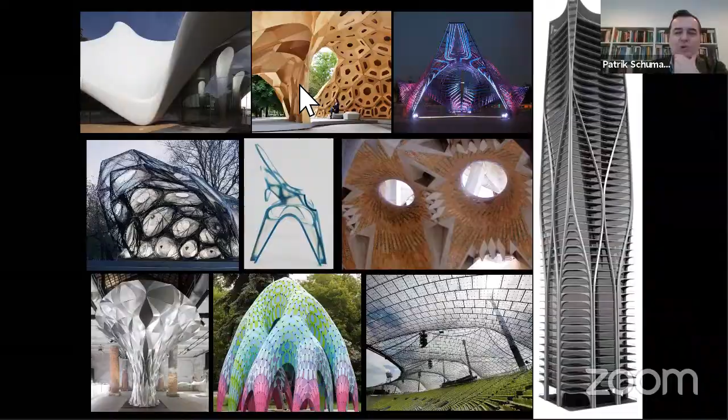We had worked towards this on a number of projects where we try to express the structure, in particular using the differentiation of the structure, which should be, if properly optimized, different at the lower part of the tower, mid tower, and upper part. So these members become more networked, denser and thicker at the bottom, and less networked and more filigree at the top.

We've done that a number of times, sometimes using topology optimization. We did a lot of that with students first - the DRL and also the Vienna studio explored these opportunities. The idea is that the differentiation of the skeleton becomes a guide for programmatic differentiation.

There's been a number of examples - from New York, for Kuala Lumpur. You can see here the very strong differentiation in stages and segments, a kind of gradient. This is the other one, the second skeleton tower we've managed to execute. Sorry, I have more images later.

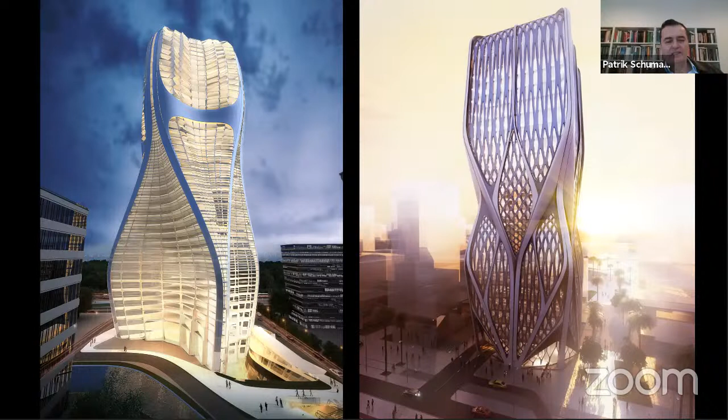This one was a study for Rabat, another study for another Middle Eastern tower, because the depth of the skeleton relief, and then a secondary facade kind of structure, can also do shading work.

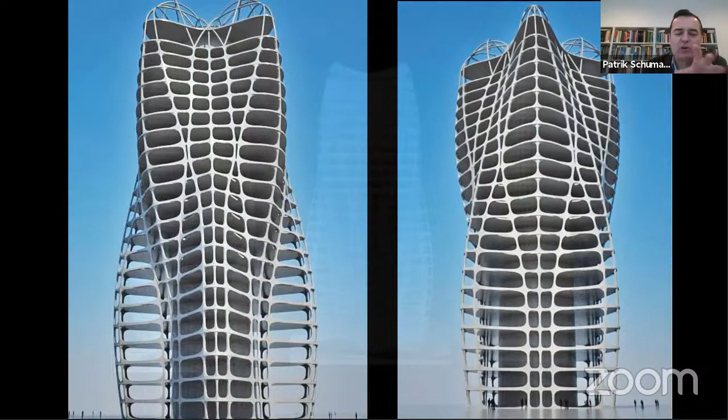This we got relatively far with - this was for Bilbao, but in the end it also didn't work. So you can see the interesting topic of layering facade and structure.

This was more or less simultaneous with the Miami design. Some towers in Brisbane, Australia also didn't come through.

These larger projects have so many factors which can get in the way, whether it's finance, something happening with a client, or neighbors putting injunctions. That happened here, by the way.

This is the tower in Macau, where we also managed to finally get something built.

Now this is the Miami design. I think it's beautiful - the rhythm of differentiation, the way the skeleton moves through different phases as it moves up and becomes quite full and open, with the column splitting up at the corner, quite heavy and encompassing the podium at the lower part.

Initially this was also designed in a way that we were briefed with 3 apartments at the bottom part, 2 apartments in the middle part, and 1 apartment per floor at the top, and this was aligning with the changing structural articulation.

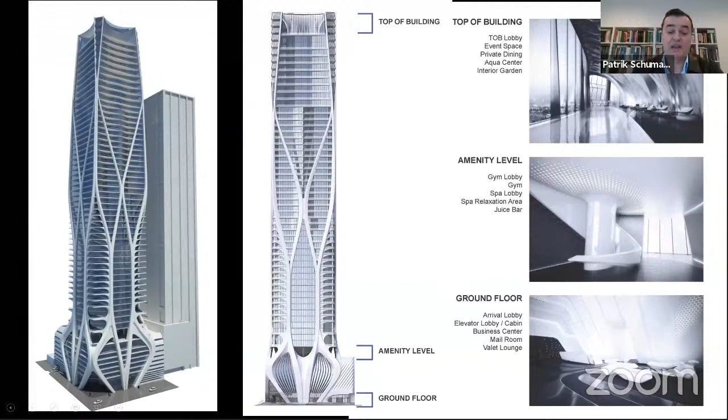You can see here already we had worked on all the interiors as well - fantastic lobby spaces, pool deck and amenity between the podium, which is car park by the way, and then top of tower special amenities for the top two floors up here.

So this is the way it was rendered out. This is a Chad Oppenheim Tower, same clients - it's one of the best towers, I think, in Miami as well. So these clients definitely have taste.

This is the way I used to show the project before we started to build - rendering out the beautiful tower and then showing top of tower, showing these balconies and the vistas you would get.

Later on I have some photos - we actually built, couldn't find a photo now, but we built a mock-up of this whole balcony part, which had to do with a special construction method of having precast elements pulled together around the rebar and then filled with concrete. It's a kind of solid bond of prefab and in situ. Only at the bottom part we had to shift to in situ, then cladding afterwards.

I don't have many floor plans in this, but this is the floor plan of the pool deck, and it's interesting - quite beautiful. You get the pool and a fitness area, and then this fantastic loggia where you also see the structure, between the structure and the facade. I have photos later of that - that's the condition here.

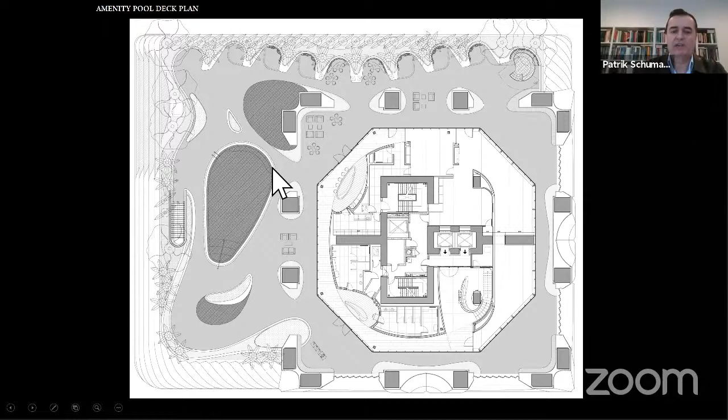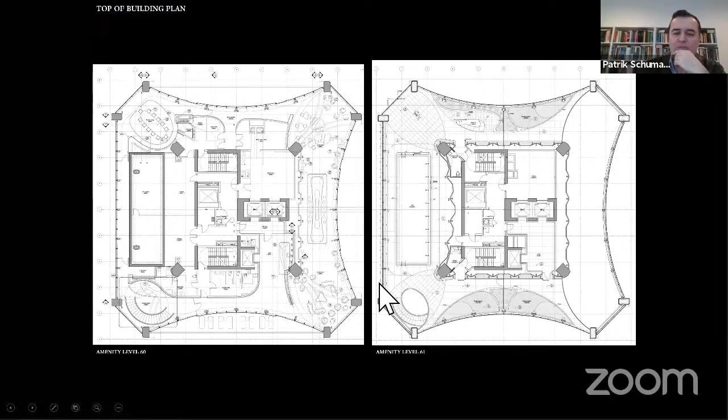So this is the plan for the top of the tower, with the pool areas and the split columns, etc., and very fantastic social spaces. That's where we had the opening party - unfortunately couldn't find images of that yet. Last year we did the opening party in the winter. So this is a design with some double height area, a special big table, massive table, and then pool up here, and a beautiful staircase swinging up across these two levels.

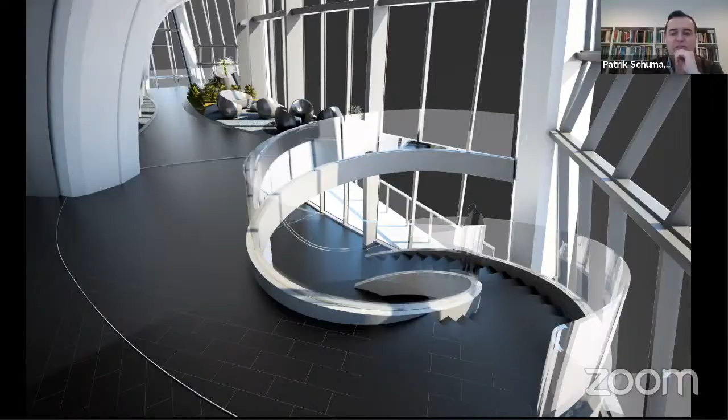This is a rendering, so this is a construction that went rather well. There was certain risk involved to use, for the first time in the world, construction to ship these panels from Sharjah and bring them together around the prepared rebar, lock them together. Initially it was meant to be just tied together. In the end they also had steel kind of braces to pull them together, and then pour the concrete and do that floor by floor. This was only possible because the concrete manufacturer was also connected to one of the investors, actually, so there was a synergy, and the risk was just taken. It went well.

Here you can see that at the bottom this was in situ. Here you can see we started up here - up here we started with this special system, and below it later on the cladding was put up, because these curves were too strong, and also timing meant we just had to get the thing out of the ground and couldn't wait for this kind of special technique to come through. And this just was a thrill to see when we came, before it was finished - seeing these things going up and the beautifully sculpted surfaces.

And this voluptuous sense, and this is around the car park. These are fantastic multi-story boomerangs to screen the car park, and of course let a lot of air and ventilation into the car park. Some of these panels were inhuman to place - we were cursed by our project manager on site. It was fantastic, I mean they're super precise, but Chris Lepine specified one centimeter tolerance, and that was obviously absolutely inhuman.

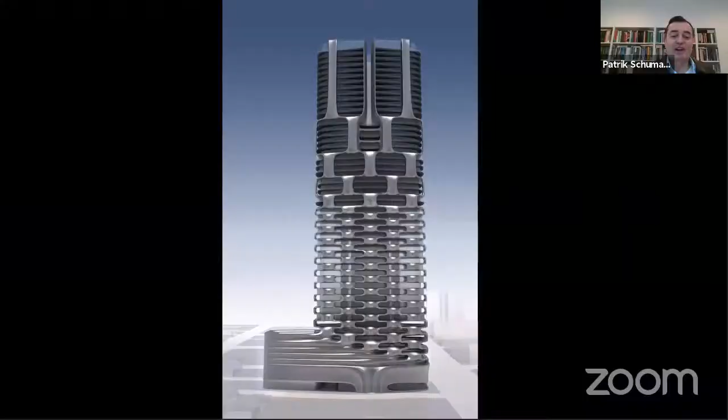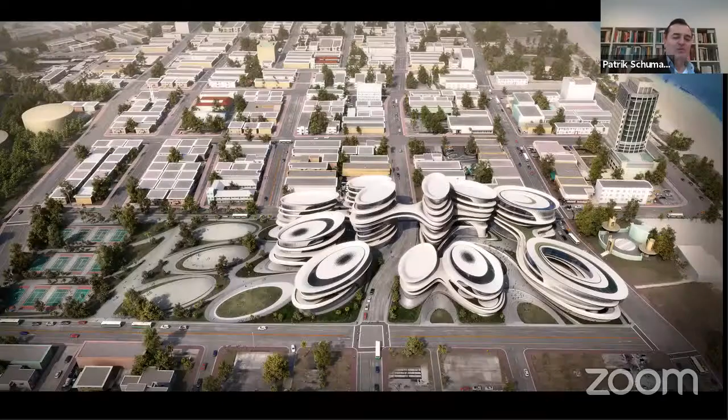We had these kind of Russian origin clients who wanted to do another one close by. So we started to sketch this, but it didn't come to anything. But I wanted to end up with this because this is something which I thought was a very nice idea and a nice design.

This is Miami Beach. There's a kind of large site. And the idea here is this to a private university by a Brazilian university entrepreneur to launch that in Miami. I think it's a great idea with all the Latin Americans converging on Miami anyway, to get a lot of Latin American students maybe come there. So it's quite dense with the gardens and with these kind of shading areas and balconies and bridges.

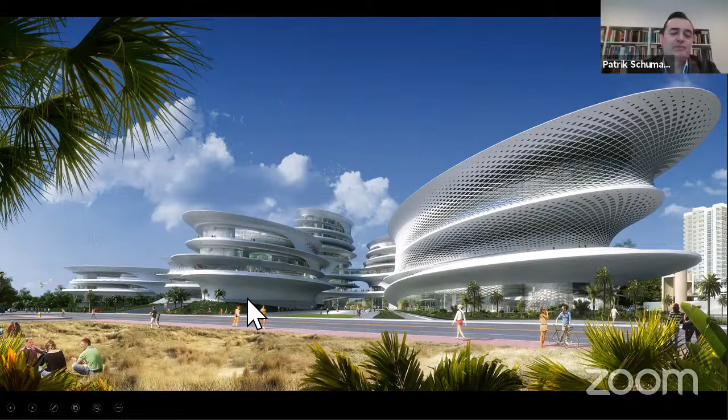These would be the classrooms on different levels. So that's something we developed, and the Miami Beach mayor loved it. But in the end, it didn't come together.

I don't know what it was. It was, I think, the investors got in some kind of conflict. I don't know if it would have been approved. I think I forgot about that. There's also a political process of voting in Miami Beach, which would have happened. I mean, it's something which I think killed our car park project. But Claudia will tell us more about that.

Yeah, it's nice. We did a lot of effort. The client in the end ran away without paying us, so I don't know if that's not a shame. Just on the side, but it's a beautiful design, so we'd like to show it here.

Well, Claudia might have more, but this is so in the end, in the last few years, Zaha always rented in the W Hotel, and she started to purchase. She then fused two adjacent apartments into that, bringing her own furniture, tables, sofas, and design, and art she purchased at Art Basel. So it's a very nice place.

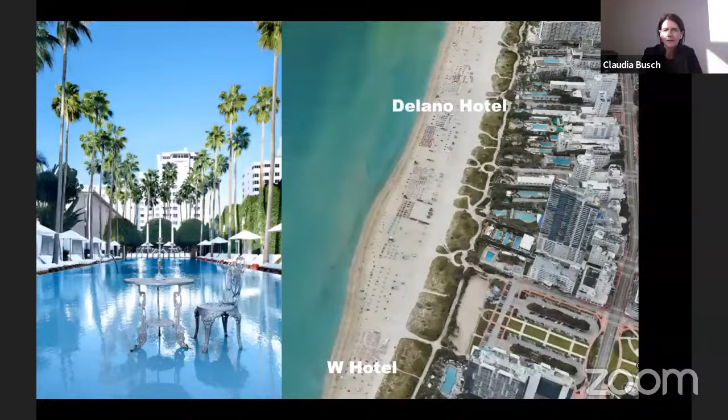As Patrick mentioned, I was here on site, working with a great team of Zaha Hadid Architects in London. They did all the design, and I was here basically checking that everything is smooth and well. After several design studies, there was basically this one idea to transform the apartment. It was a very simple idea, actually, to use the dividing wall between two apartments and replace it with this continuous ribbon.

This is a very simple idea, but it's actually much more complex to build, because you can't put one continuous ribbon of metal transported into the apartment. So it was actually built in 4 pieces and then welded so that one would see no seam. The floor as well, there's a resin, and it created this complete smooth surface. I think for architects it's really important, the seam, as it's an element of the design.

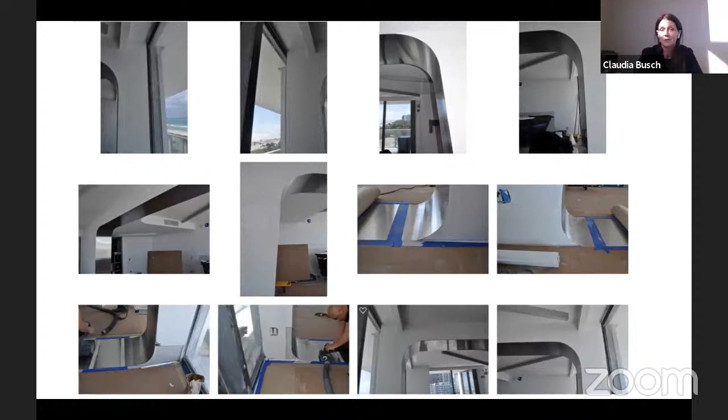There were a lot of photographs done, very detail oriented, done perfectly well. We probably sent them like 100 pictures. These are some images of the installation, and you still see the blue line where they will weld it further. These were done actually by manufacturers from the ship industry, and it was done really beautiful.

Then, like Patrick showed already, she added her own furniture. I think it's really nice because it emphasizes the space, these glass tables, keeping it open and bright, and it's completely different to what it was before. One really can enjoy the beautiful view out to the ocean. So that is a project.

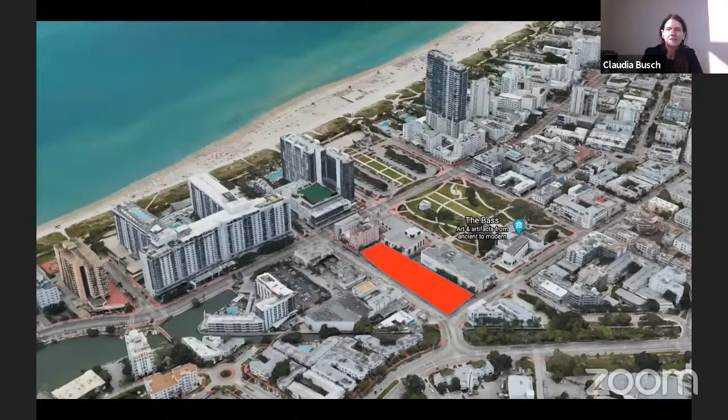We were also involved and collaborated as local architects for Collins Park garage, a public project by the city, in 2012. At that time, it was the thing in Miami to do parking garages. There's also this amazing garage done by Herzog & de Meuron. They had a competition out for doing this parking garage, and they invited Zaha to compete, and she presented this design of a parking garage, which is like one continuous loop.

I remember that was in 2012, and we were all sitting there in this conference room, and Patrick and Zaha were presenting this continuous loop, very simple, and they looked at it and they loved it. I said, okay, that's the project. And then they asked, can this be built? For Miami, that was still a risky thing, to build a continuous loop of concrete.

Then Patrick and Zaha showed all these projects that had been done in China and in the Middle East. It was an amazing thing to be in this room and to see the building officials in Miami realize that something from a drawing can actually be built.

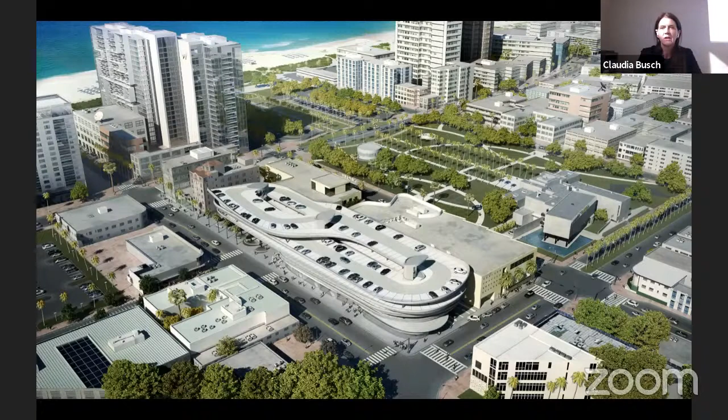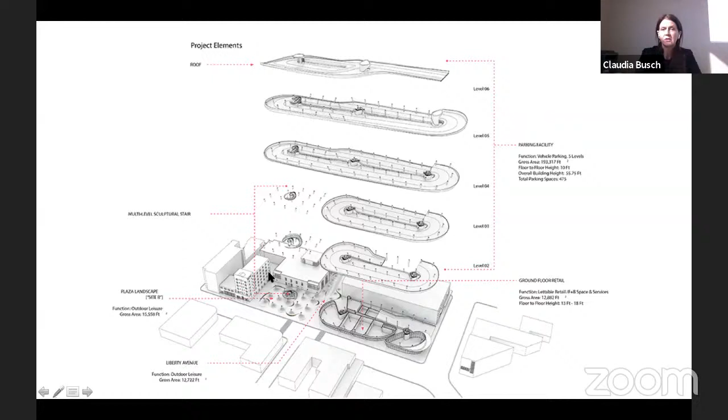Everybody was very excited, the project was commissioned and further developed. It was also interesting, this continuous loop. It was next to the museum and the library. The idea was that the loop would spread over to the other side, over the street, and then be higher on one of the sides and create a park. That was then called Collins Park.

The project went on for 3 years. I think it was a political shift on many levels. The people that were there in the beginning, there was nobody there 3 years later. Then unfortunately it got canceled. It would have been a great project.

Thanks, Claudia, beautiful. I'll just maybe ask John Stuart, another colleague of FIU, if you'd like to reflect. I know that Zaha came to MBUS a couple of times. Maybe reflect on your impressions of Zaha.

Well, I'm almost choked up with Patrick and Claudia's reviews. It just reminded me of what an important force she was. I think Claudia used that word. I was actually thinking back to the spiral that Claudia ended on.

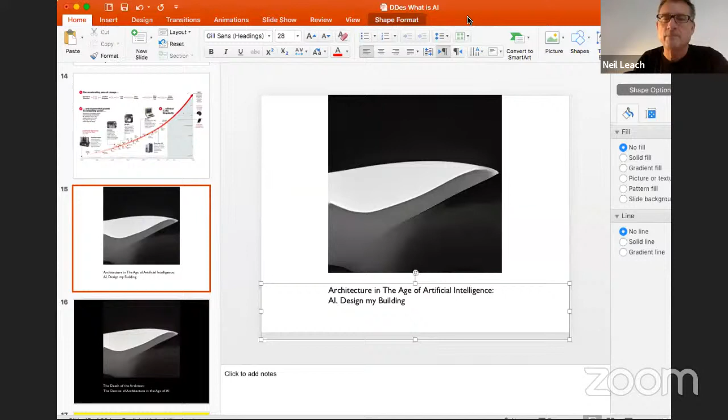To show you precisely what this is - an image that was generated by Refik Anadol using StyleGANs, using a database of the work from the office. And of course it was part of a kind of latent walk, as it's part of a video, but you can capture at one particular moment something that actually, to my mind, resonates with my impression about what the work of the office was.

And I guess the possibilities - Tom Main and Wolf Prix have slightly different approaches, but they're both interested in the possibilities of AI. For Tom Main it's about opening up the search space beyond those things you might initially have thought about, as a kind of combinatorial exercise. Wolf Prix is something different, but similarly almost treating AI like some kind of muse that might inspire you and open up the possibilities of what things might be. Yeah, I like that, it's something we should look into, definitely.

Okay, let me stop sharing. So I have a question in the chat here - a question about sustainability. To what extent does sustainability come into the project in Miami and elsewhere?

Yeah, I mean what I'm looking for is ideally, let's say there's this element which is about embodied energy, where you choose a certain concrete which is going to recycle. These are just decisions you make, that they have a certain value, and that's where you get certified.